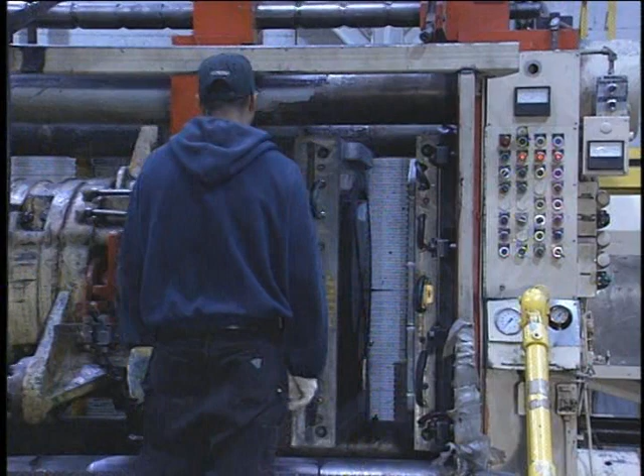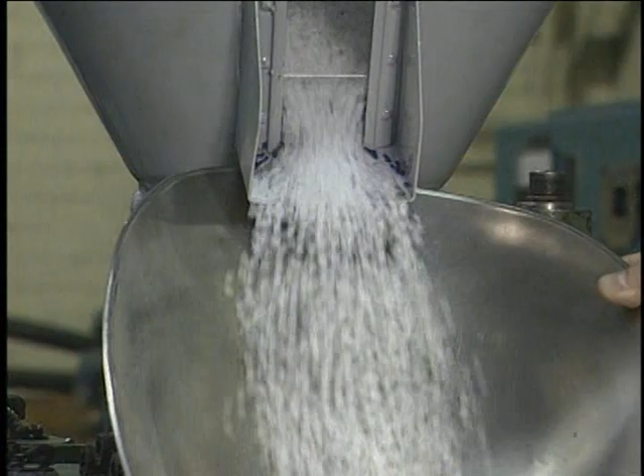To better understand the injection molding process requires understanding some properties inherent in plastic itself. The simplest definition of a plastic is any natural or synthetic polymer that has a high molecular weight.

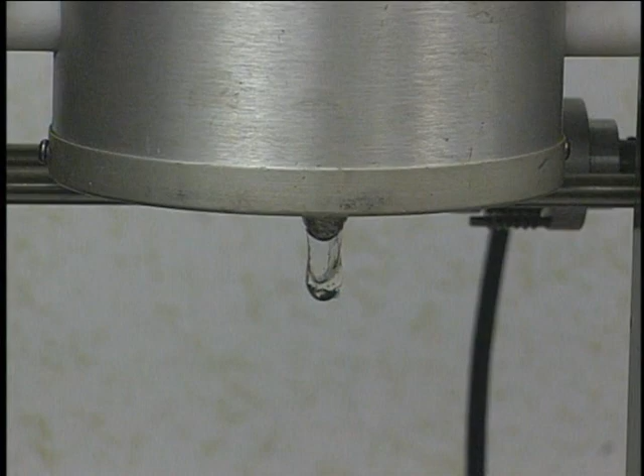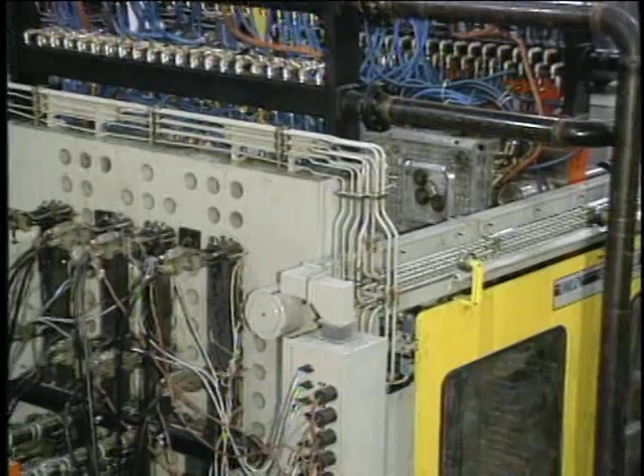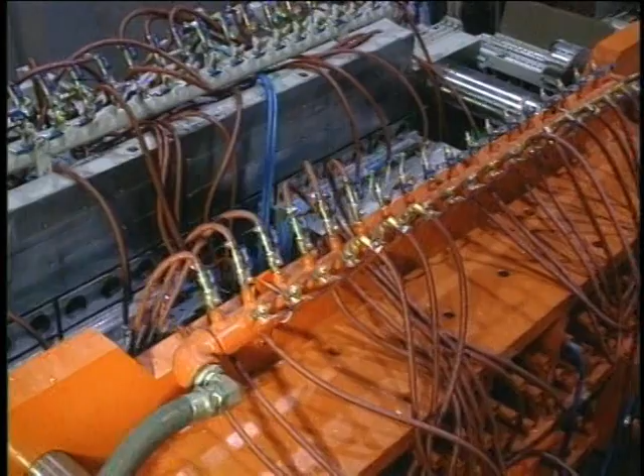There are two types of plastics: thermoplastic and thermosets. Thermoplastics undergo a reversible change from solid to liquid when heated, and can be cooled and reground for reuse over and over again. Thermosets undergo a chemical reaction between two reagents when heated, and achieve their strength through interlocking chemical bonds. Once molded, thermosets cannot be resoftened. While thermosets are injection moldable, most materials used in injection molding machines are thermoplastics.

Injection molding plastics is extremely complicated because of the infinitely changing pressure, temperature, and velocity inside the mold. These molding conditions directly affect the properties of each molded part. A change in any of the conditions will alter the parts produced.

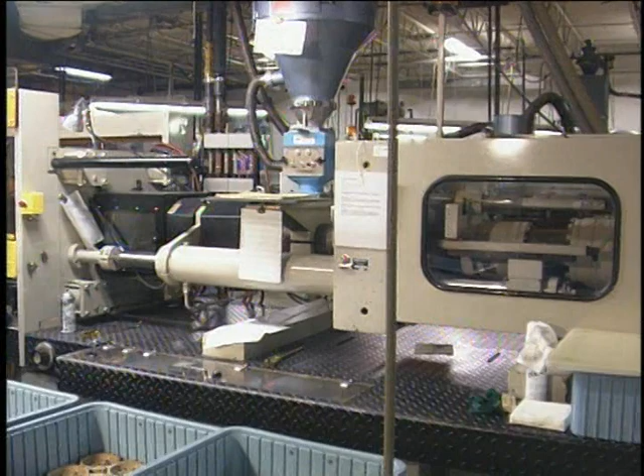There are four primary elements that influence the plastic injection molding process: the molder, the material, the injection machine, and the mold.

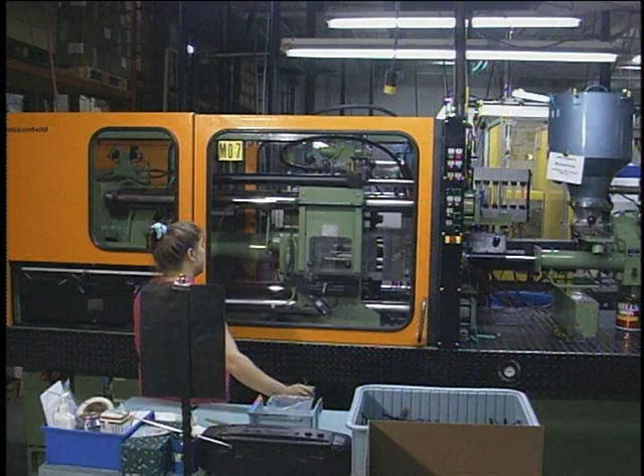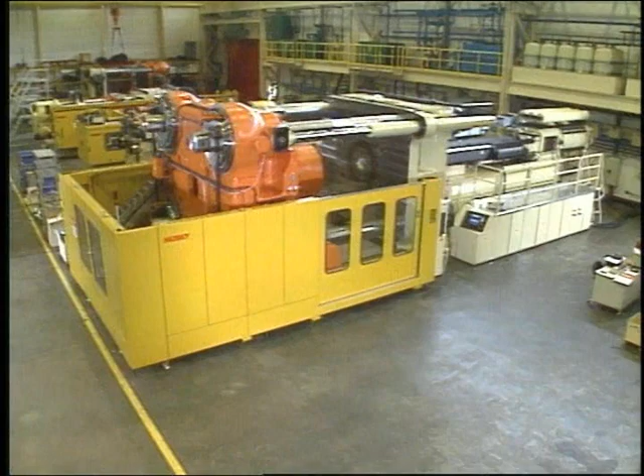There are a variety of injection molding machines in use today. The vast majority of these machines are hydraulically actuated and have 3 platens. But newer styles, such as 2-platen injection molding machines and electric injection molding machines, are now gaining market acceptance.

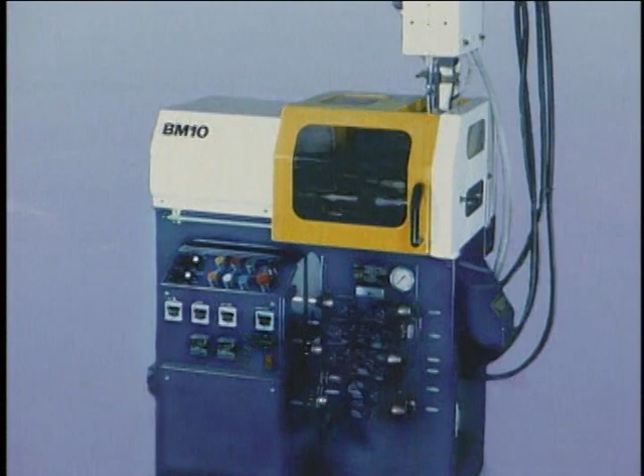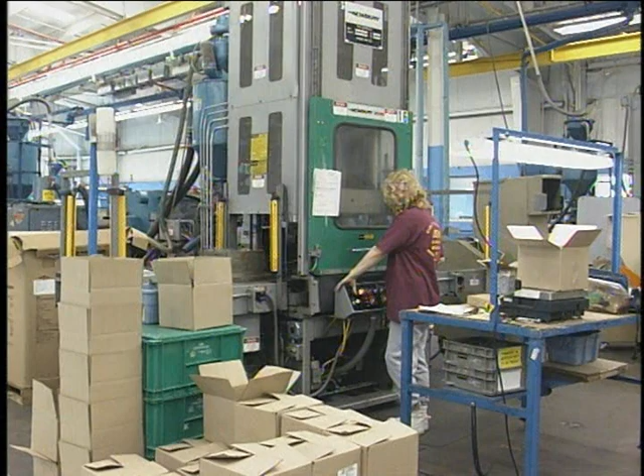Injection molding machines range in size and complexity from desk-size units up to machines the size of a small house. Most injection molding machines are horizontally oriented, but vertically oriented molding machines are available. These vertical machines are primarily used for insert molding.

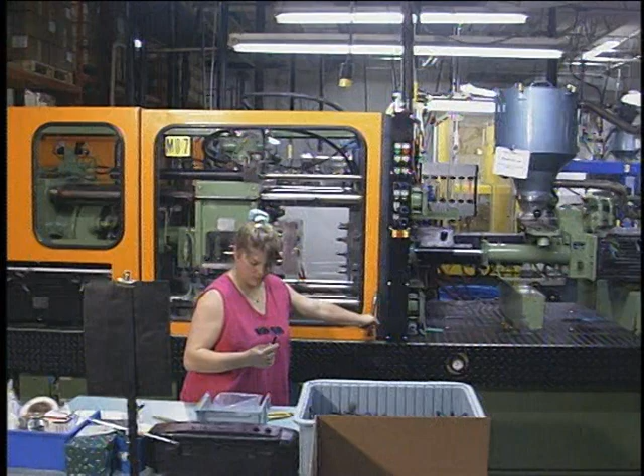All injection molding machines are a combination of 2 systems: an injection system and a clamping system. The injection system heats the thermoplastic material to its appropriate viscosity or flowability and then forcefully injects it into the mold. There are 2 types of injection mechanisms: the reciprocating screw, which is the most common, and the 2-stage screw.

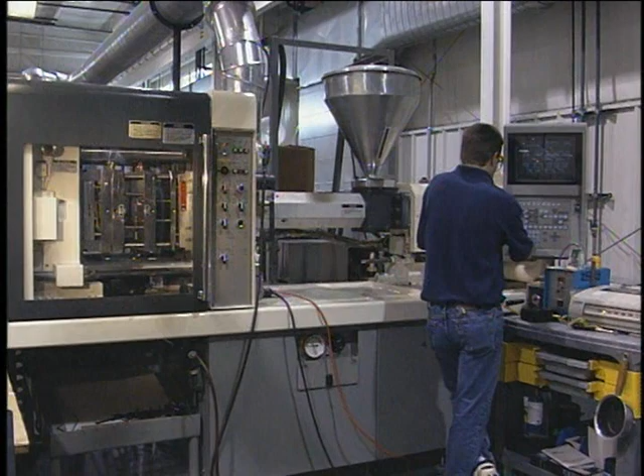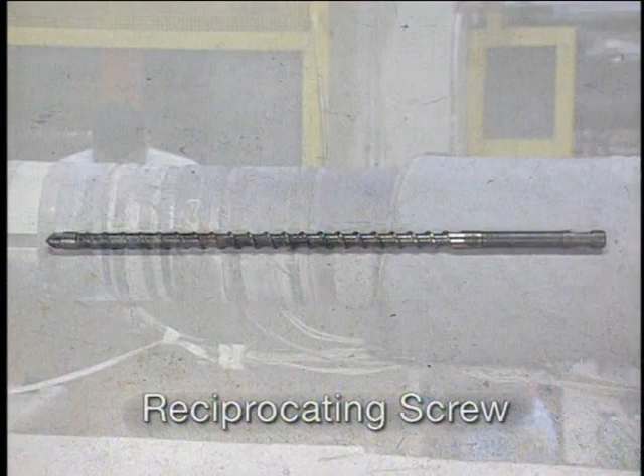The main parts of the reciprocating screw injection system are the hopper, a reciprocating screw inside an externally heated injection barrel, a hydraulic motor, and an injection cylinder.

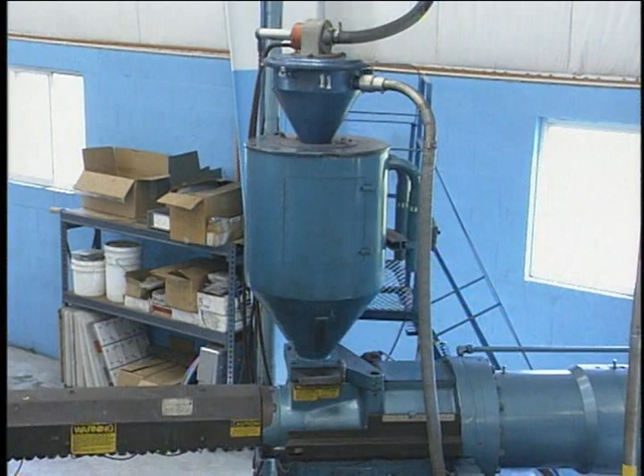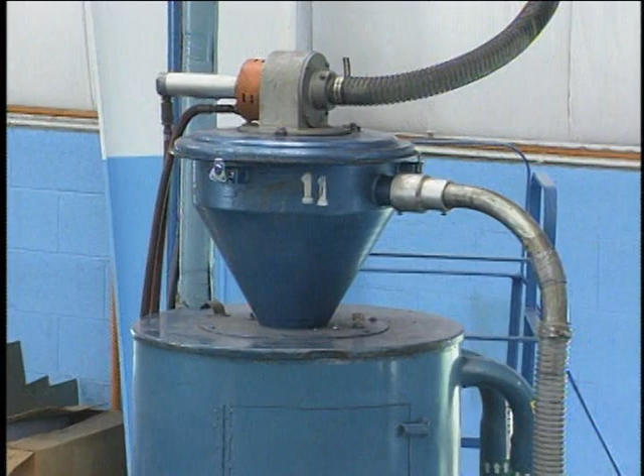Resin material is fed to the injection barrel from the hopper. These hoppers may be filled manually or vacuum-fed automatically, and often have dryers attached to the top to remove the moisture from the material. As the resin enters the injection barrel, it is driven forward by the rotation of the screw, which is powered by the hydraulic motor.

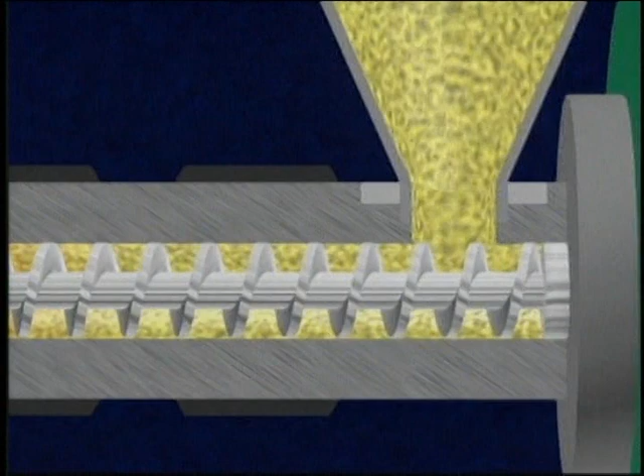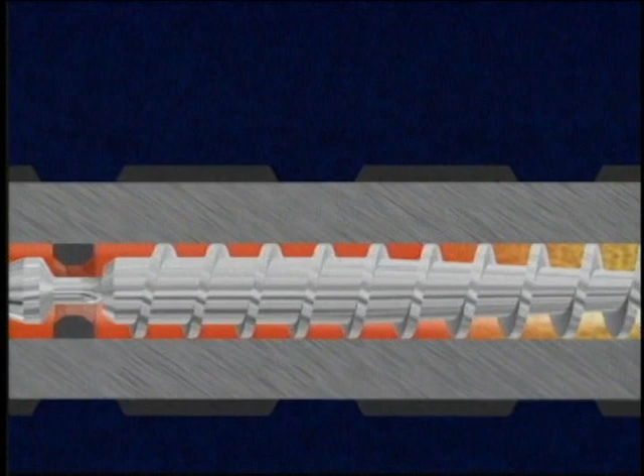The resin plasticizes or melts as the turning screw drags it towards the nozzle end. This is referred to as drag flow. Drag flow causes the polymer molecules to slide over each other, creating frictional heat, which melts the material.

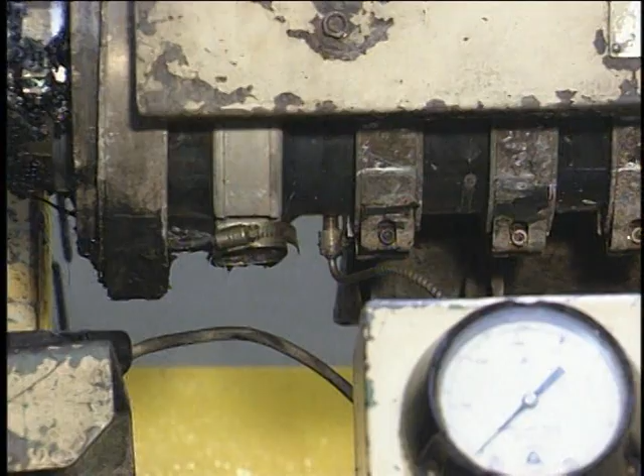External heating bands provide additional heat to the injection barrel. The heating bands bring the material to its final temperature and compensate for the radiation heat loss. The temperature is controlled by 3 thermocouples in the barrel and 1 in the nozzle.

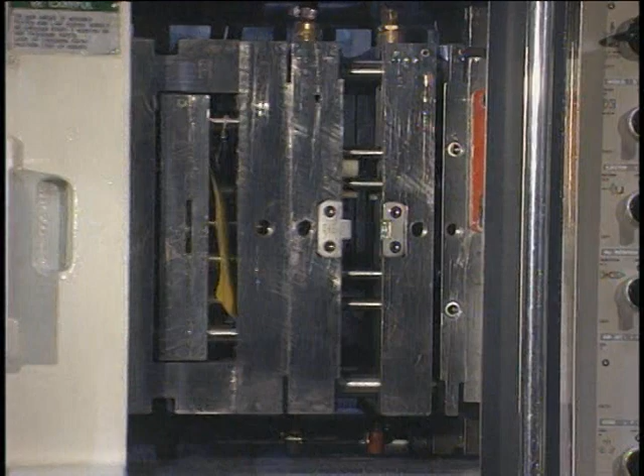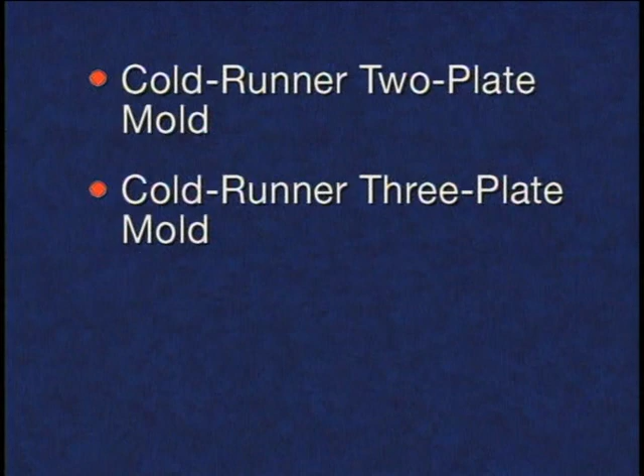Over time, many different mold designs have been developed that meet specific injection molding requirements. These mold designs include the Cold Runner 2-plate mold, the Cold Runner 3-plate mold, the Hot Runner mold, and the Insulated Runner mold.

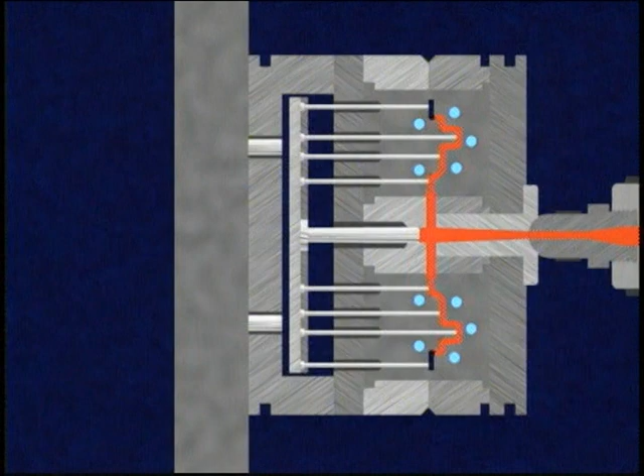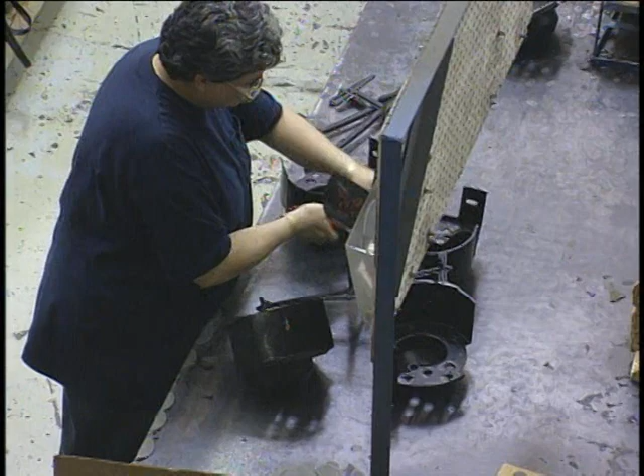The Cold Runner 2-plate mold consists of 2 plates with the mold cavity and core mounted on them. The Cold Runner system molds the sprue, runners, and gate along with the parts. After ejection, the parts are separated and the rest reground.